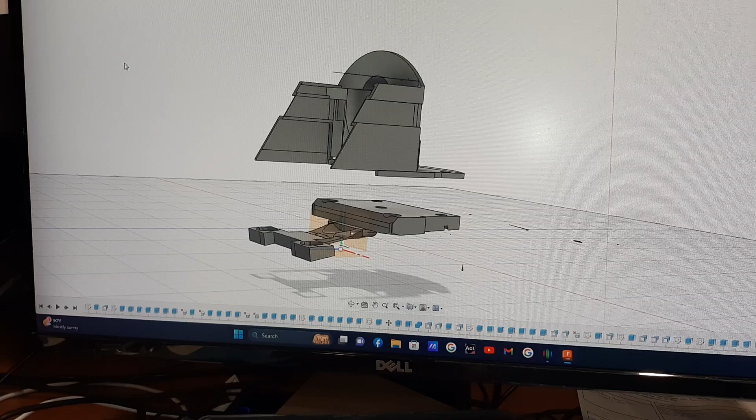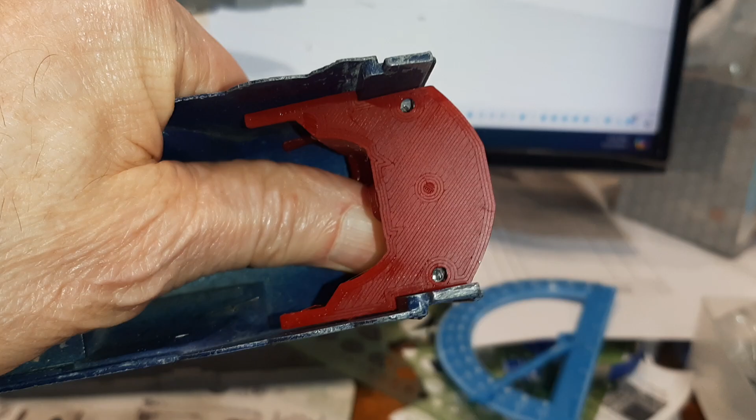Okay, I've been working on the firebox for the Royal Blue, the American Flyer cast iron Royal Blue, the bullet-nosed Pacific, and I have some features on mine.

Not everybody has these features, I just know that. In one case there's a window outlined there, and on mine, Leon, who painted my body, actually cut that window out.

There's also some panes of a window in the front here, and he cut those out too. So mine is open here and here, whereas this one is only open in the back.

Okay, so I thought, well, if I had some lights and could put a light back there, you'd actually see through that, and maybe that would be a good idea.

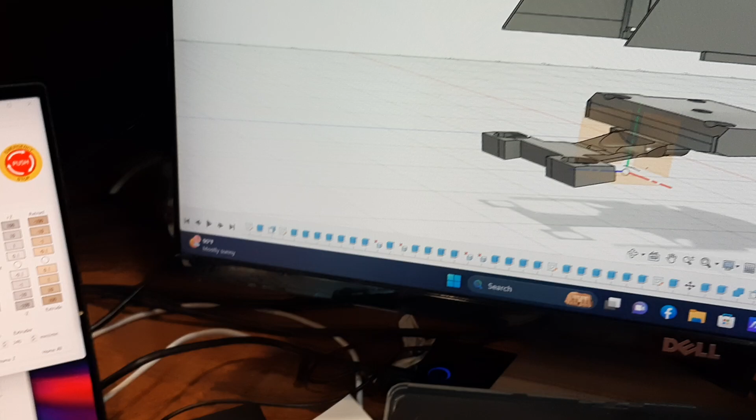So I've taken this... I know how to hold it, right? This is the design I started with, and this is where I'm at the moment.

Underneath it is the ash pan. I didn't add the thin layer I have in mind, but in any case, here's what we've done.

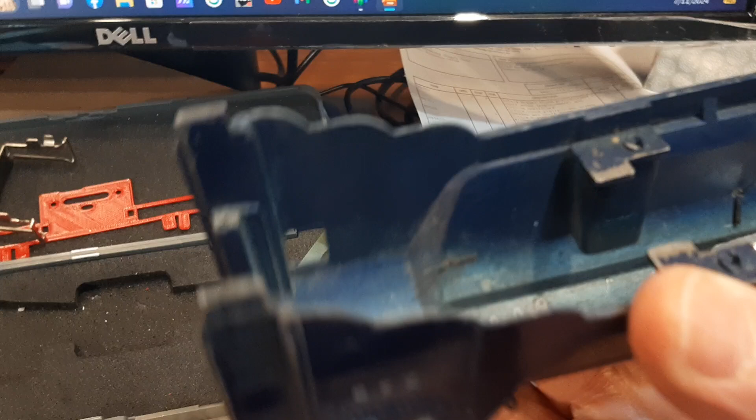I've cut it at a severe angle, because when you look into this you'll see in the body there's that grayish space there. That's the angle the body has, so the top will be shorter than the bottom. The bottom will be longer in order to block off the hot gases coming from the steam engine.

So I've moved that in. I've pushed the wall in about 7 or 8 millimeters so that there's some space between the side window and the wall.

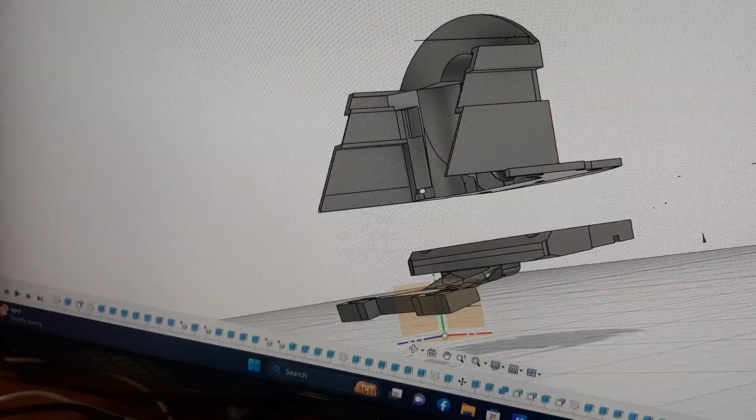I'm hoping I can put some light either behind it or in front of it, or somehow light that up so light comes out the windows as well as the cab. We'll see what I can come up with. Should be interesting. Then I just carried that all the way around.

I narrowed the fire— well, let me make it easier for you guys. There we go. I narrowed the firebox a little bit. I didn't shorten it like I talked about. I just put in— the fireman is going to be sitting more or less on a pedestal right here.

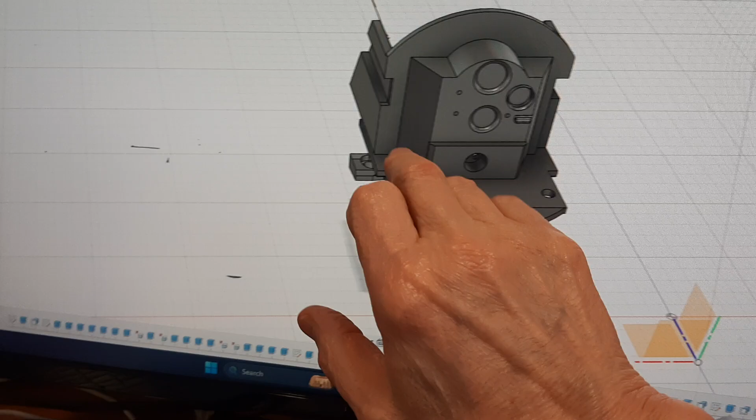He's going to be leaning over looking at things, or over here, I guess, because there's the handle, right? So he'll be able to lean over and look at the gauges, then lean over and look out straight down the track through that window, and also out the side. He could also lean out.

There is one window that is open. He could lean out and open it and lose his eyeglasses, like I did once. I wasn't on a steam engine, but I looked out the window and my eyeglasses flew off.

All right, anyway, so this took 3 hours. Modifying a part is sometimes harder than just going from scratch, but I really didn't want to do all this stuff again.

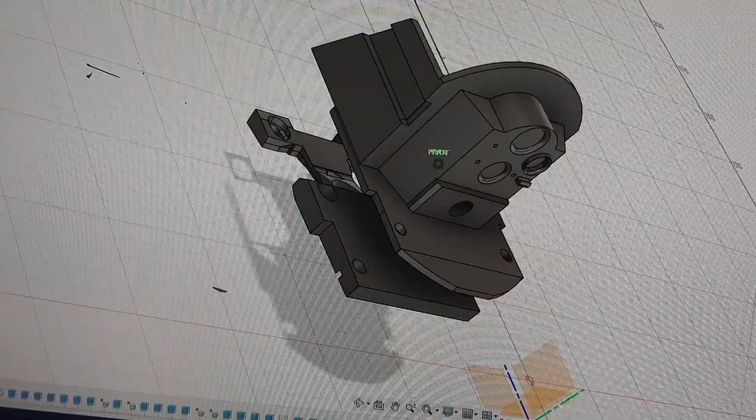So I kind of didn't do that— I did it the harder way, more or less. But I don't know, I get through it, it's fine.

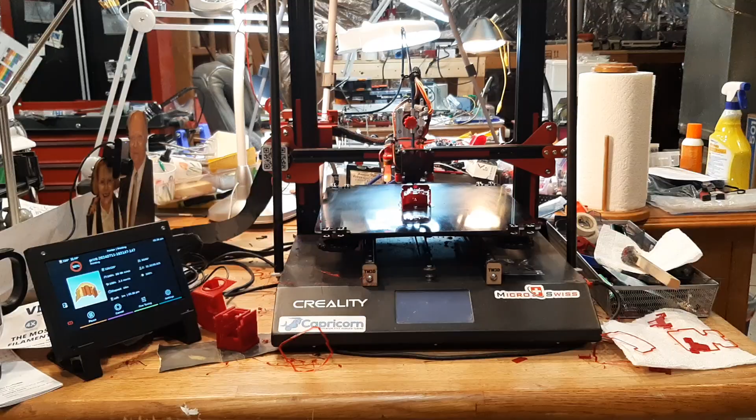And I think I'm printing a piece now. Oh, I see I might have some problems. Oh, shit, seems like I have a lot of problems.

I'm printing it on low density, high speed, all that, and it looks like it's probably not going to come out too well. But this is why we print to test.

That's a print, high speed. So I'm going for dimensional accuracy, and I'm going to see how the length is and all this other stuff.

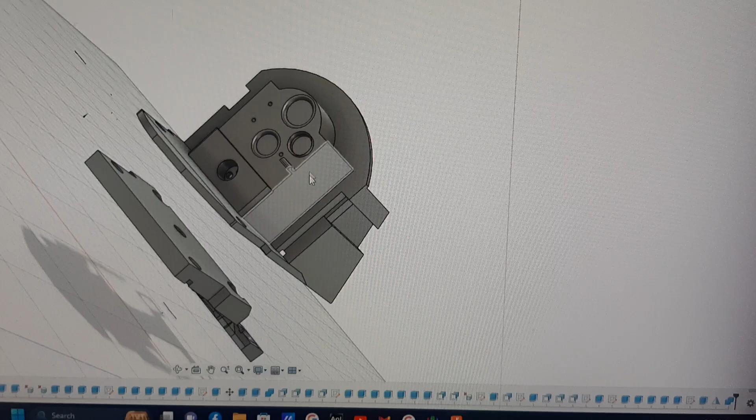And if there's a side that's too thin or something's not filling in properly, I can beef it up next time, which will be tomorrow because it's late. This took a lot of time, but I feel good about it in that the Royal Blue is a special engine, and I don't mind putting it in.

Well, you're saying, yeah, I'm building my own, right? Okay, but I know others that have the Royal Blue, and they all act like they want it to be special, and I agree with them. Let's try it, okay? So I'll put this together.

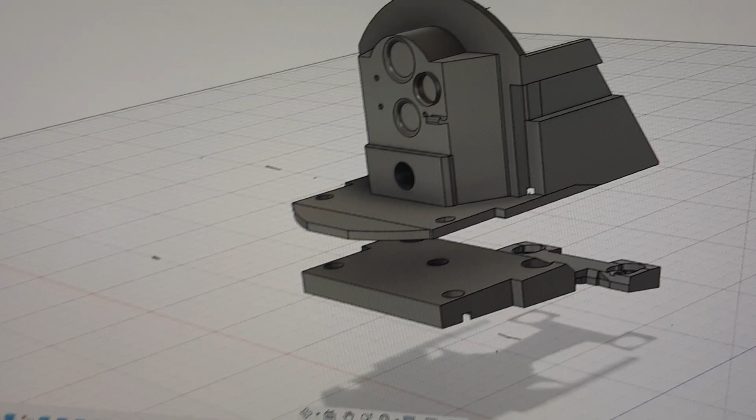I can see a hole in there right now. Oh, that's for the bottom. I know what that's for. That's for the harness to come out. Anyway, I'll work on this again tomorrow and keep you filled in.

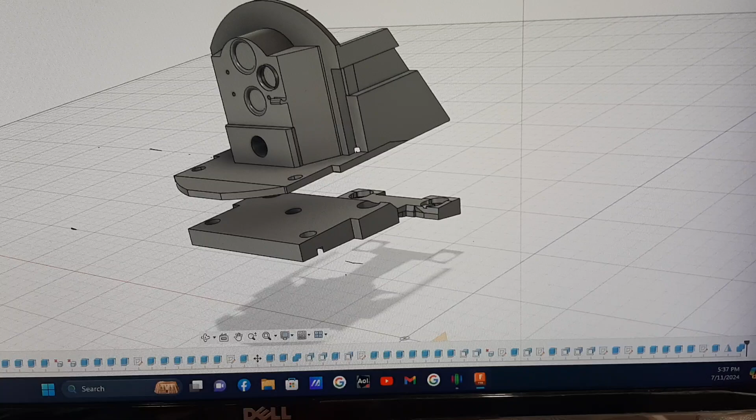But tomorrow's Friday. I have to get this done tomorrow. This engine has to be going into final on Saturday, because Sunday I have got to be cutting chassis on the mill. I have to. If the engine's not done, I'll be cutting chassis on Sunday. I'll be cutting that notch in the chassis for the gear, and I'll be doing a few other things around here.

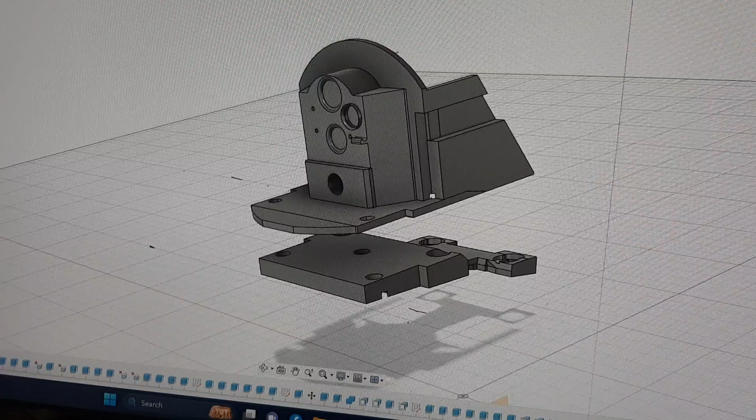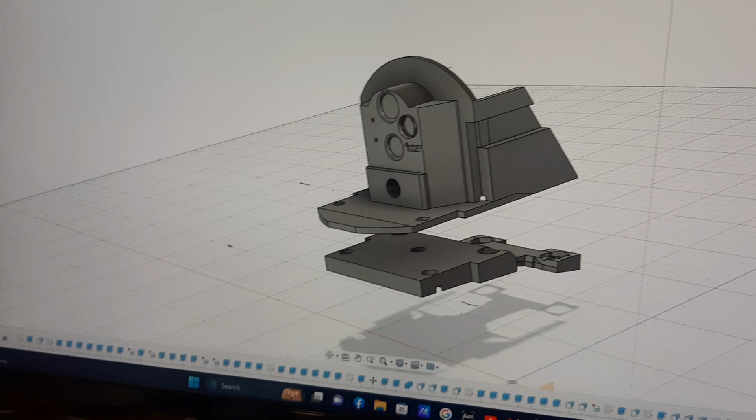I appreciate all of it, and I know not every video is so cool or exciting. I don't know what to say. This one is tedious. If you'd watched me do this, you would have shot yourself in the head. I almost did, and I was doing it. But I try to show you the stages and the steps. I don't want to make it sound like it's impossible. This is not impossible. It's complicated for me because I'm just complicated. I make it complicated, I guess.

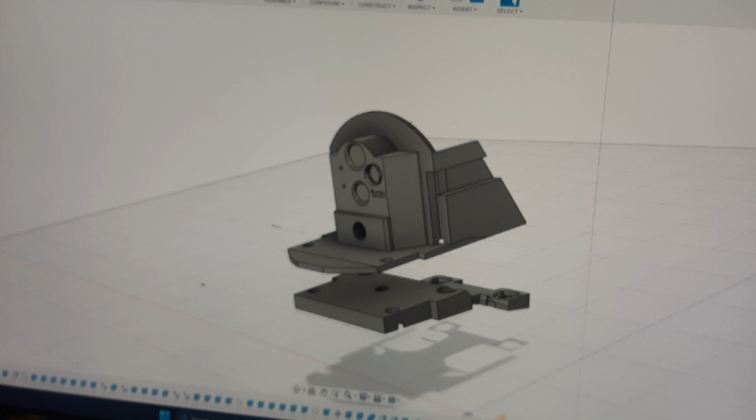But in any case, don't be afraid of CAD. You can learn it. You can make things. You can design your own part. We had some very simple parts, right? The little bracket we needed to hold the reed switch for the sensor, that popped right out. The speaker box, that came out real nice, and you glue a speaker in there, and you got a speaker baffle. We make our own trucks for the tender, and these trucks can be built for anybody, any cars.

There's a 6-axis truck. We design that and print it, so you guys can do that too if you have a printer, or if you have a buddy, or your kid has a printer, or his school has a printer, or her school. I've heard libraries have printers now. You go to libraries, no books, it's all tablets and 3D printers. Well, that's not bad, that's not bad.

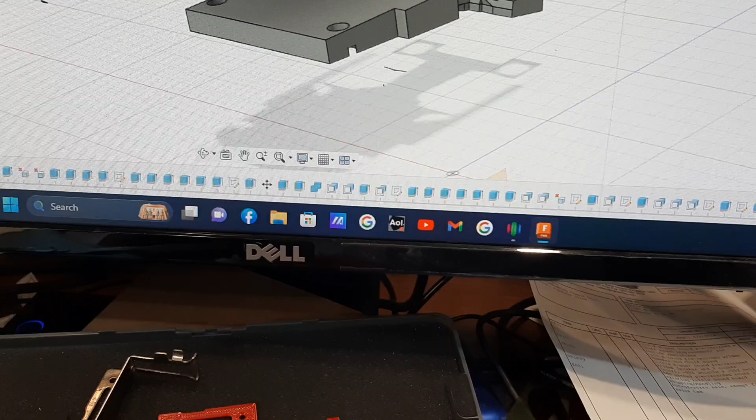I kind of like books, but that's okay. You can print all the brackets that go inside the engine to hold all the digital stuff. And we have a tender chassis that we've printed. This is the extended chassis, extended range tender chassis for the Royal Blue.

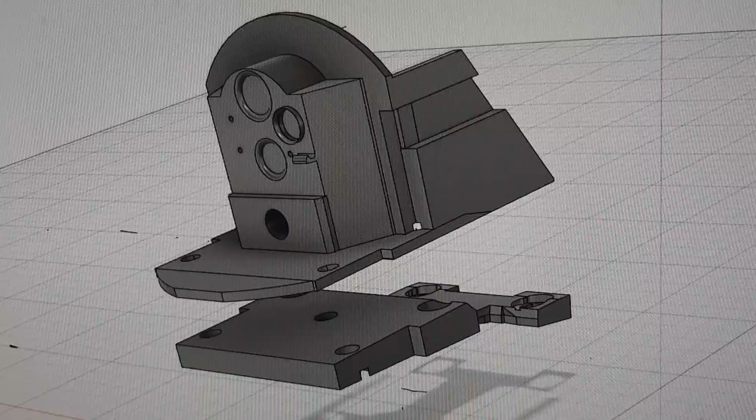So you can use my files to print your own engine. You can change them, you can design something else. You can work with buddies, and you build this and I'll build that, and let's build a train. It could be a cool, fun hobby. Okay, prototype's done. I'm going to go look at it later.